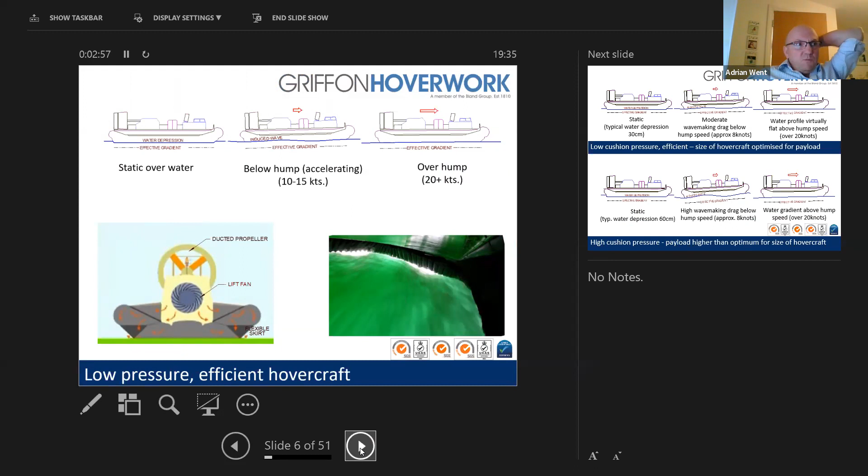And a little bit, just very quickly, Malcolm will recognise these pictures at the top of the page here. Really, our focus is on low pressure skirts, and being able to get above the water, and not, as you can see, high pressure skirts on the bottom of the page here, like you'd see in a landing craft air cushion, where effectively you're using brute force to overcome the gradient and get over hump.

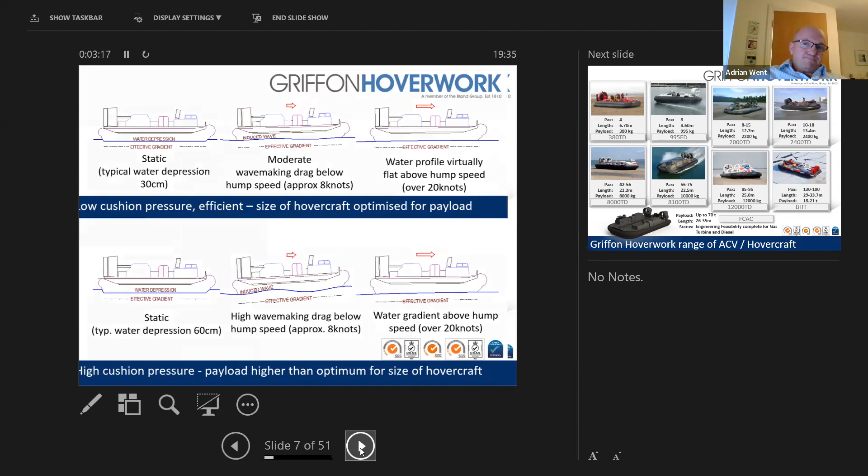We retain our product range right from the small hovercraft, sort of 4 to 5 man, right through to the BHT size hovercraft. We've got some designs developed bigger than that, and we're working with some military customers around the world who are very interested in that at the moment. I think that's part of the strategic context in which we're operating - that people are interested in, there's better opportunities to sell that sort of thing at the moment.

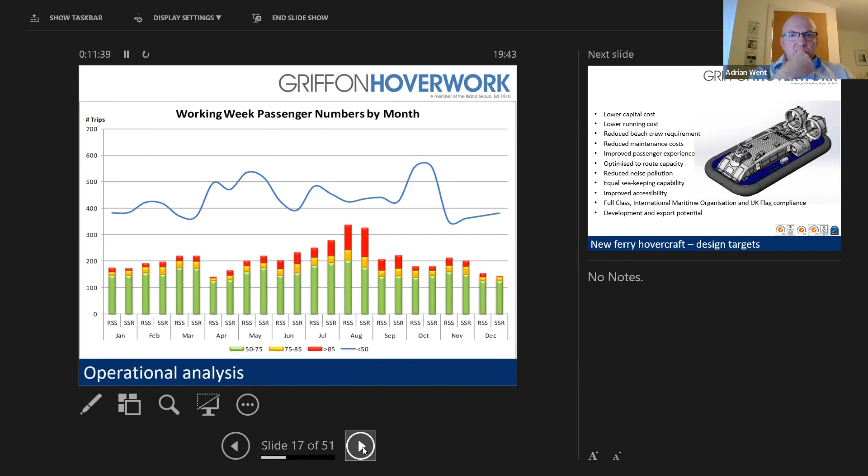Starting off with the product development, one of the products we developed over the last few years, you'll be aware of the Isle of Wight route, which was delivered using the AP1-88. What we did was study the throughput of passengers and worked out what the optimum would have been for the size of the hovercraft. The aim was to develop something that would be a lower capital cost than the 188 to start with, that would definitely have a lower running cost, that would be cheaper to run all the time, that would give you enough capacity nearly all of the time, but maybe not all of the time. It would also be regulatory compliant with the latest regulations.

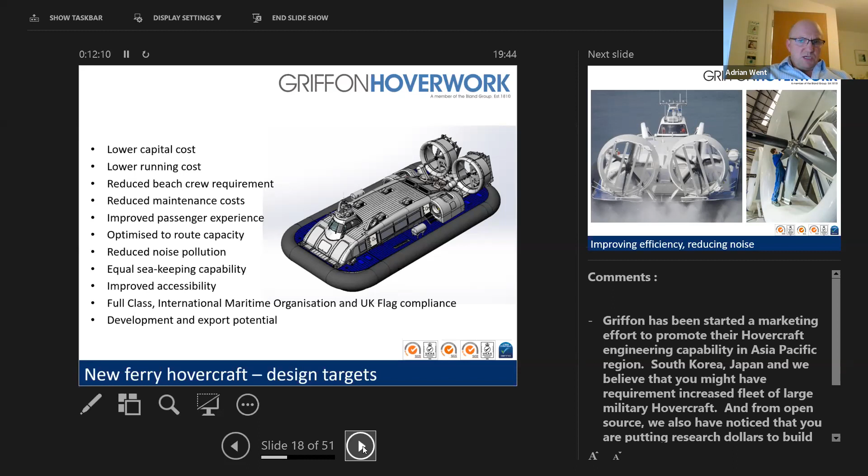So it was a challenging target that we set, but with quite a lot of work from across the board, we came up with a reasonable solution, which definitely reduced the noise by increasing the propeller diameter, came up with some more efficient ways of controlling the craft as well, which removed the need for the bow thrusters.

The bow thrusters that were on there, we always said wouldn't be needed, but the pilots insisted we had those on there, and later on they were removed, so they don't have the bow thrusters anymore. They have significant control from the aft end of the craft with variable pitch and the cascaded rudders on that. So it's been very successful across the board.

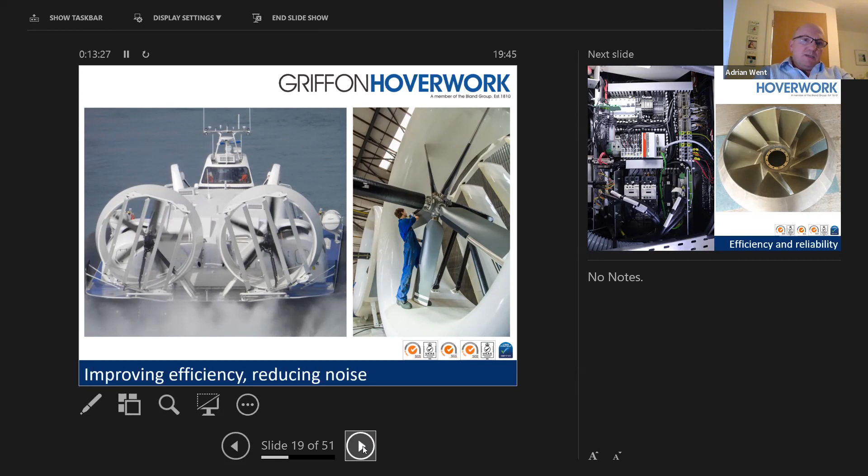Clearly, when you introduce a new craft like this, its prototype goes immediately into passenger service. And so, of course, there's a whole lot of things to be developed all the way through, and there's some lessons we've learned about the way it was built, etc., which we'll be putting into practice.

Now, we did try to reduce the maintenance bill by using quite a lot more electrical actuation rather than hydraulic actuation. And we took some electric actuators which had been very effective in industrial settings, but which actually proved to be not quite so reliable in a marine saltwater environment. And so some of those will be replacing back again with hydraulics when we put together the hovercraft with our new customer in Japan.

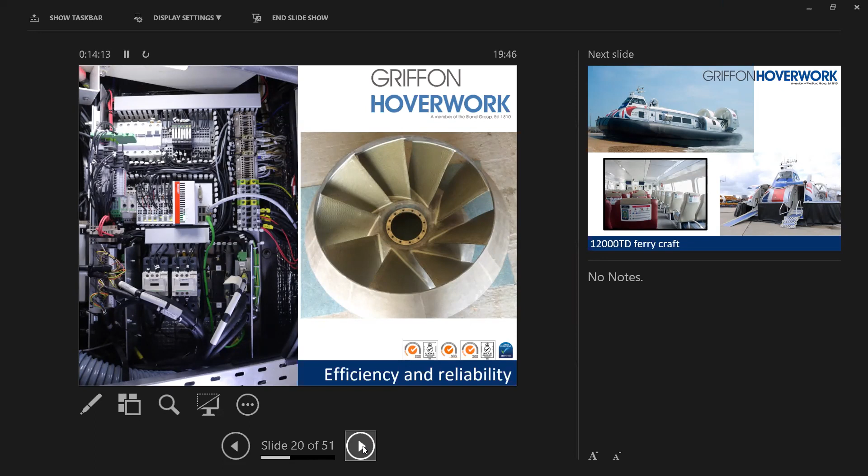With a lot of work from Malcolm, this was the first hovercraft to use the mixed flow fan. One of those is pictured there as well, which has given us a fantastic improvement in efficiency. That in turn means we're stealing less power for lift. We can use a bit more of the power from the engines for thrust, which in turn meant with the increased efficiency of modern diesel engines, we could reduce the engines on board to 2 from the 4 that you would have on the 188. That was a significant saving, both in the capital cost of the craft and, of course, in the running costs as well.

Adrian, could I just ask, hold it a second? It's just that I think Owen's iPad, it's not on mute, and sometimes we hear some noise coming from your direction. Owen, are you okay? You hear me? I can hear you, and I will put it on mute. If you wouldn't mind muting for a bit, thank you, Adrian. I think that'll make things more comfortable for you.

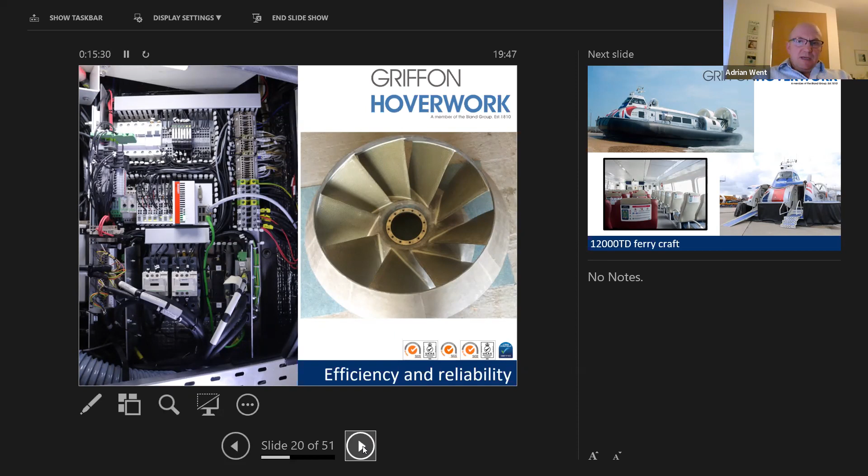And so it's been a good solution, reducing the shore crew by dropping its own steps and ramps, so you can get people on board a little bit easier, and quite a pleasant sort of passenger experience, I think, with reduced noise, better visibility from the craft as well. And so overall, I think now that it's bedded in on that route, I think it's been quite successful.

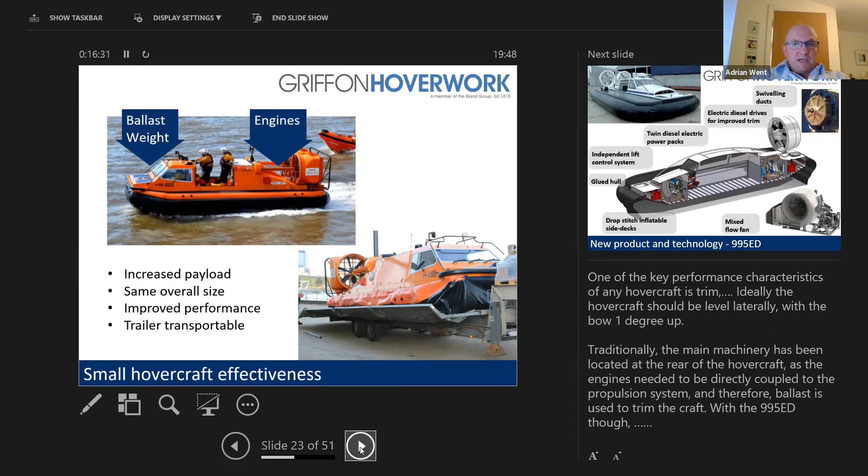At the other end of the scale, we've looked at trying to get a bit more payload onto small hovercraft, and sort of started with the plan form of the 470, this one here, the RNLI one. And you'll be aware that obviously when you've got no payload on board, you need to ballast the front of the craft if you've got all of your machinery at the back of the craft. And so we tried to overcome that by distributing the machinery around the craft.

And we did that with an electric transmission, and with a diesel engine at the front and at the back of the 995 craft. We put a lot of innovation into this. So we glued the hull together rather than welding it. We used drop stitch side decks, which are inflatables that blow up into a parallel sided shape. We used the diesel electric system, the generators and the motors in this. The motors are in the hub of the propellers, from the automotive industry, and actually the ones we used, Yasa motors, were one of the only ones available at the time when we developed this. Now there's a far greater selection out there. We may not have selected that one if we were to do it now.

So do I think this has really succeeded? I think it effectively proved the point. We got a bit more payload on a relatively small plan form. I think the drop stitch side decks are quite liked by our customers. I think the sort of overall design was quite liked by our customers. But actually, for a small craft in the setting that will be used by policemen, soldiers, rescue people, whatever else, what you've ended up with is something that is too technical for them to maintain. And you have to, I think sometimes we always have to remind ourselves that we never sell a hovercraft to a hovercraft enthusiast. We sell a hovercraft to someone who just regards it as the truck that he goes to work in.

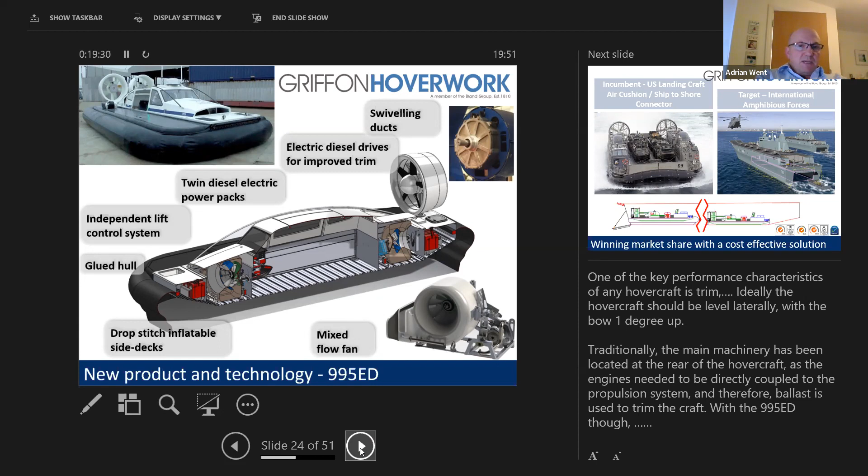So the other one that's in development at the moment is sort of an amphibious landing craft, LCAC-type size hovercraft. Clearly, the way the US have gone is they've increased the power to go to the ship-to-shore connector. They have kept the size roughly the same because they still have to park it in the smallest of their landing platform docks.

And so they've been forced onto a very high pressure system. They've also attempted to introduce a certain amount of fly-by-wire, which has delayed their project by about 4 years. They're just getting the ship-to-shore connector into service now with Textron.

But many of the amphibious forces around the world are not constrained by the same envelope as the smallest of the ships that the US Navy uses. So in particular, the Navantia design of a landing platform has a much bigger dock than the smallest landing platform docks that the US Navy use.

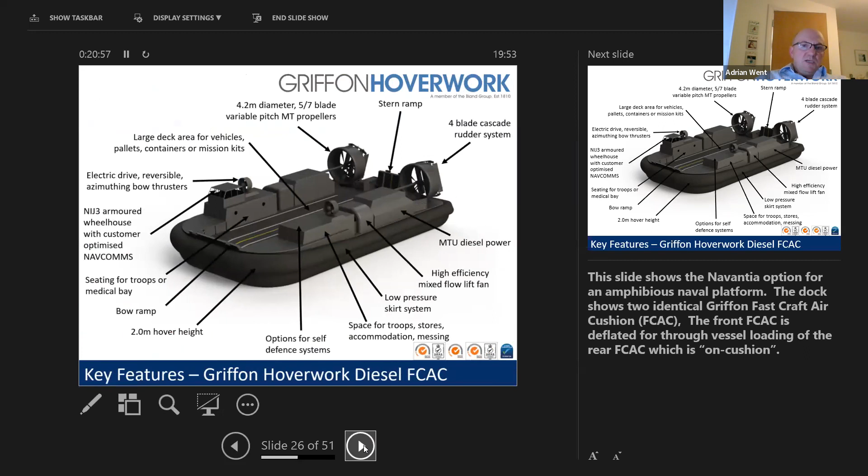And so it's possible, if we take the most powerful diesel engines that MTU build for tanks, that a 6-engine model would work, particularly if the customer doesn't want a main battle tank on board that is as heavy as the American or the British one. And many people around the world don't have that. Actually, marine amphibious forces have concluded recently that they probably don't really want to work with main battle tanks, and so that could work in our favor here to get diesel engines into this.

We've also got the design developed to put in a gas turbine as well, but the preference is to try and really differentiate ourselves from what Textron are doing by achieving diesel power. That keeps the thing more efficient and cheaper to run for its life, cheaper to buy in the first place. And very importantly, for many navies, it means they don't have to train any technicians to look after gas turbines, because the diesel engine systems are in common with the rest of their fleet.

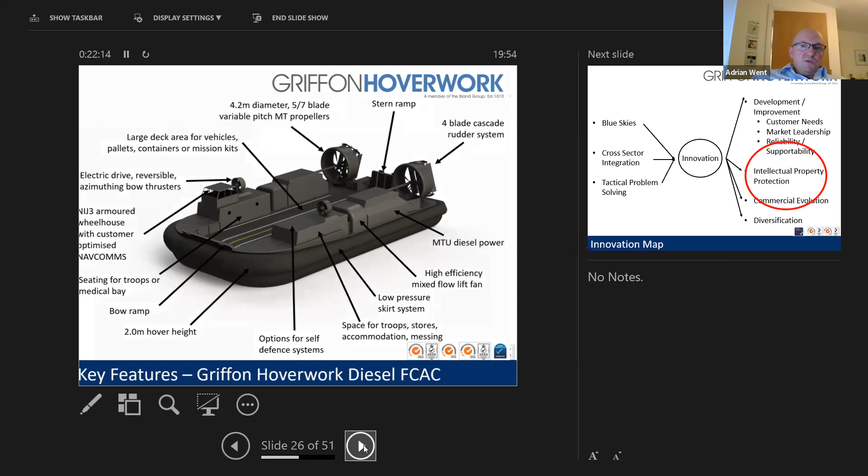Okay, so moving on from the technical bit, a little bit on intellectual property. Of course, selling all around the world, and with the emphasis on having to build in the customer's country, we're always going to leak some of our intellectual property. And how can we go about looking after that?

So we do have some patents. Those techniques that we used with the mixed flow fan and the drop stitch side bodies that you saw on the couple of slides earlier, we've got 5 patents on those, but they're only UK patents, and patenting them around the world is prohibitively expensive. So you can't really do that.

And actually, when it comes down to it, all the countries that might copy your stuff would carry on and copy it, whether it's patented or not. It's a bit of a double-edged sword as well. To get a patent, you have to publish some of the design, and so sometimes just keeping quiet about it is a better route to keeping it under wraps than putting a patent on it.

Really, what we have to do to protect our intellectual property is to make sure that we keep at the front edge of the market all of the time, and we work hard to try and do that. In that way, if we're going to license a product elsewhere in the world, we can effectively license the B model to that country rather than giving them our latest technology.